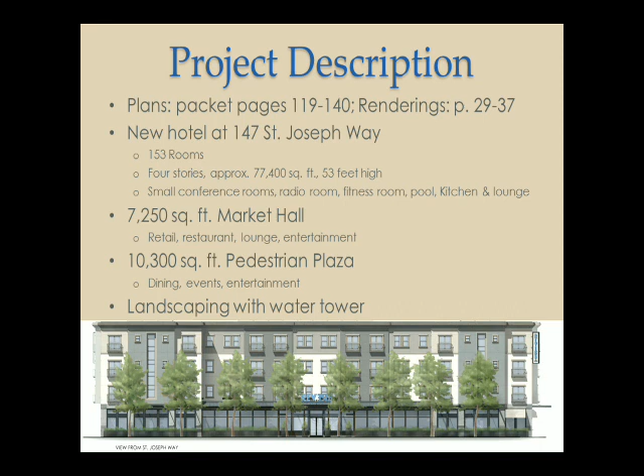The project provides parking for 167 vehicles. There are currently 166 parking spaces associated with the Park and Ride, and the project will replace 30 of those spaces. The parking is landscaped with shade trees and screening shrubs to prevent visibility from the roadways and public ways, and is implemented with water quality BMPs throughout.

The project also involves reconstruction of St. Joseph Way to conform to city design standards, including sidewalks and streetscaping on the hotel side of the street, and parking for 16 vehicles. Though not technically part of St. Joseph Way, at its western terminus there's a proposed wetland water quality interpretive area.

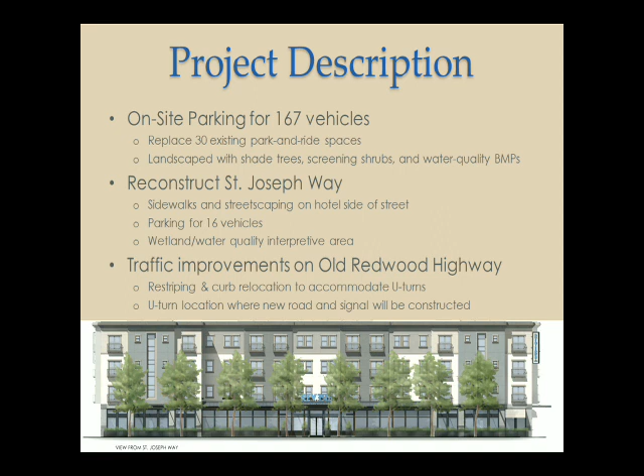There are also traffic improvements proposed on Old Redwood Highway. As part of reconstructing St. Joseph Way, there will be a turn median where it meets Old Redwood Highway, allowing left and right turns in, but right turns out only, so only southbound travel onto Old Redwood Highway. To allow for some northbound traffic, we've asked them to include a U-turn at the location of a proposed traffic signal, which I'll show more of as we move on.

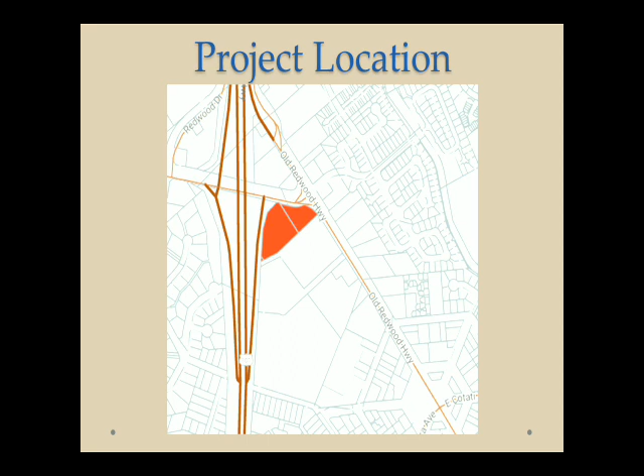So that's where the project is located, pretty much the southwestern corner of Gravenstein Highway and Old Redwood Highway. This is a view looking south, which also shows the existing parking lot and the heavily compacted area off to the left in this aerial.

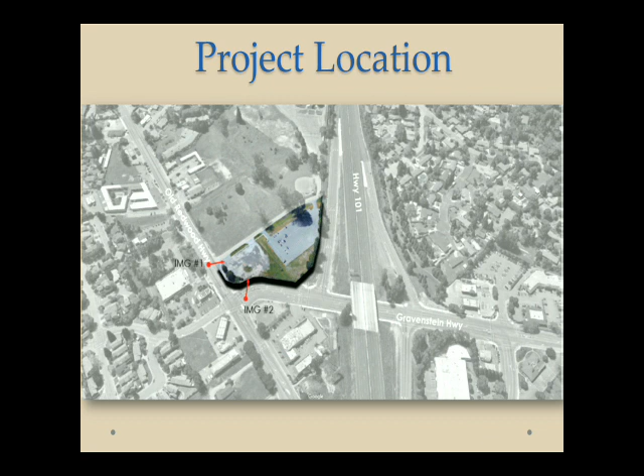Today, in this image, you can see there are two major lots and a tiny third lot, a small triangle about 450 to 500 square feet in size. The majority is covered in asphalt with the park and ride lot, and the far right side is denuded gravel. That's an old site, used to be a gas station, and Tubby's Restaurant was there. Since then, all the tanks have been removed, remediation has occurred, and the site's been cleared, but currently it's vacant and has been used for a Christmas tree lot for the last few years.

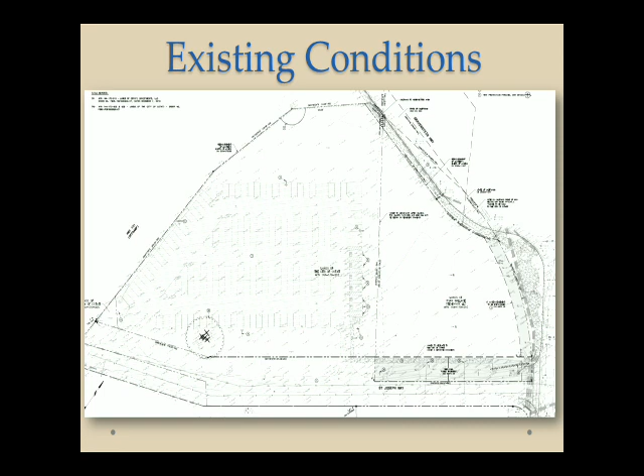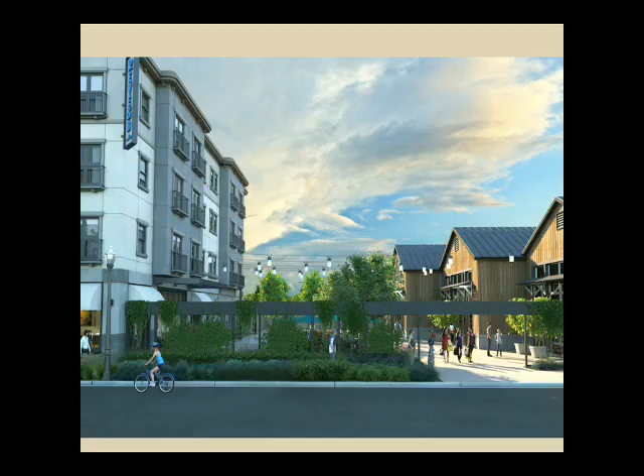This is a rendering submitted by the applicant, showing how it would appear as if you're on St. Joseph Way. It has active ground floor uses in the hotel, and the market hall also has active uses such as restaurants and retail. This is precisely what's called for in the DSP, and the pedestrian plaza is also an important component of what the DSP is looking for, pedestrian-oriented hotel development.

Looking at the hotel, you can see some of the architecture. It uses a flat roof, offset planes, a series of colors, and decorative windows, all of which help break up the massing of the building. The barn-like structures are distinctly different but complement the building because of the historical features utilized in the hotel itself. Also, the cornice of the hotel is done in a way reminiscent of turn-of-the-century commercial buildings and provides an attractive top to it.

Access to all of the market hall is from within the plaza; that's the way you will access those buildings. As well, from the plaza, you can access the hotel.

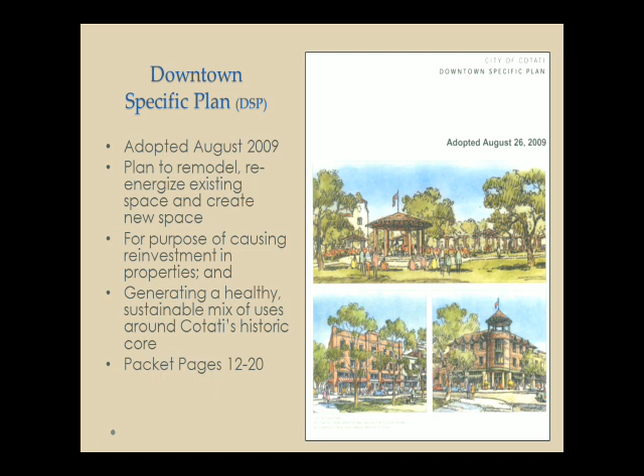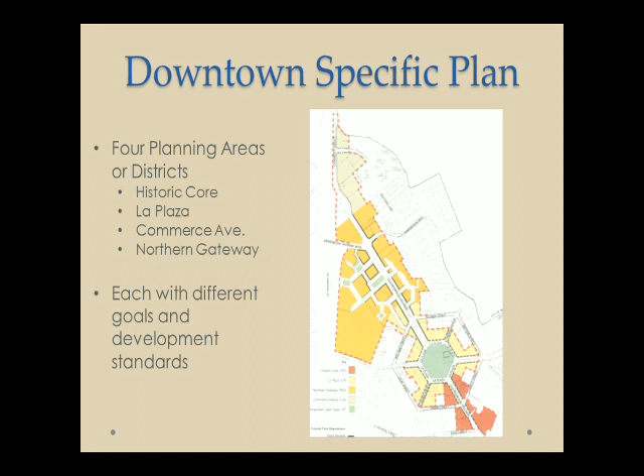Within the downtown specific plan, there are 4 planning areas. There's a historic core to the south. There's La Plaza, around La Plaza Park. The Commerce Avenue, which is all the way to the north of this site, and then the Northern Gateway, which is this particular site, which this site is within. Each of the different areas or districts have different goals and development standards. This one is located in the Northern Gateway.

The focus, according to the DSP, is for regeneration. As I said, this was once a used site, so it's about reutilizing the sites, and for revenue generation. It quotes this: the DSP says this area of the plan presents the largest continuous opportunity for a substantial revenue stream. It transforms underutilized land into a mixed-use district. Two primary goals are to reconfigure Old Redwood Highway into a vibrant mixed-use, multimodal, and beautiful urban street.

And lodging, again, is specifically called for in this district: develop a pedestrian-oriented hotel with active ground floor uses, capture sales and hotel taxes. Some of the key development standards include the maximum height, which allows for 4 stories and has a 50-foot limit.

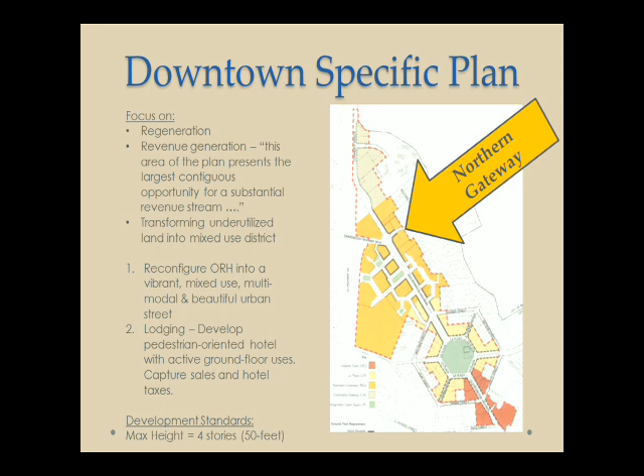Part of this proposal tonight, we're going to be talking about variances, or considering variances. There are 2 variances that this project would require. One is to the block length, and we'll look at that in a moment. The DSP establishes a maximum block length of 500 feet. As proposed, the block length, the way it's calculated, is 570 feet.

In this case, a mid-block road connection—let me just go to this next slide—this mid-block road connection is not something we want. If you look at this site plan, there's no way to run a road to connect to the 101 off-ramp or the Gravenstein Highway. Neither of those connections would conform to Caltrans roadway standards, nor would we want to run a road through this development.

To do so would significantly diminish the good assets of this project, including the plaza and the market hall and the pedestrian flow that it creates. That said, the pedestrian plaza does actually create a connection between Gravenstein Highway and St. Joseph Way. So the block is interrupted by a pedestrian way, which I think is just as valuable as interrupting the block with a road.

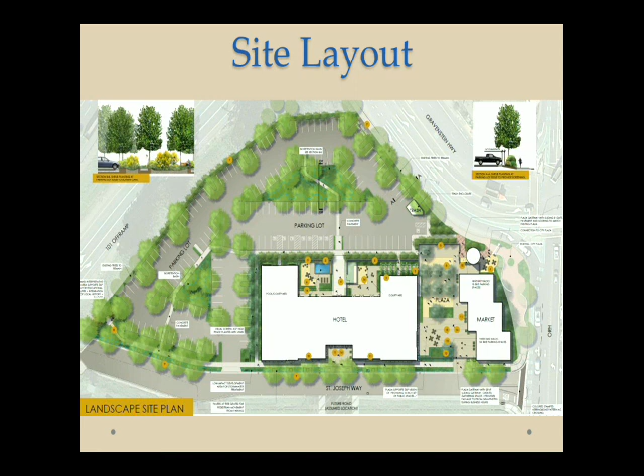The variance that we're going to discuss next is the building height. The downtown specific plan allows for 50 feet in this district. It is the tallest district within the specific plan. Other areas of the plan limit height to 35 feet. This allows up to 4 stories.

As proposed, the roof of the hotel is at 50.5 feet, and the parapet extending above the roof goes to 53 feet. On the roof of the structure are elevator and stairwell access, which extends up to 58 feet. The code allows for a 3-foot addition for features on top of the building, so we're really looking at about a 5-foot variance to the height, to allow for the parapet, but also the elevator and stairwell access, which are important safety features.

With respect to the height, in terms of whether it could be reduced: the first floor height is 16 feet, basically from the ground to where the second story meets it. So the ceiling height inside is comparable to what you're seeing in here, or less. To reduce the first floor height would diminish part of what's called for in the specific plan, which is active ground floor uses.

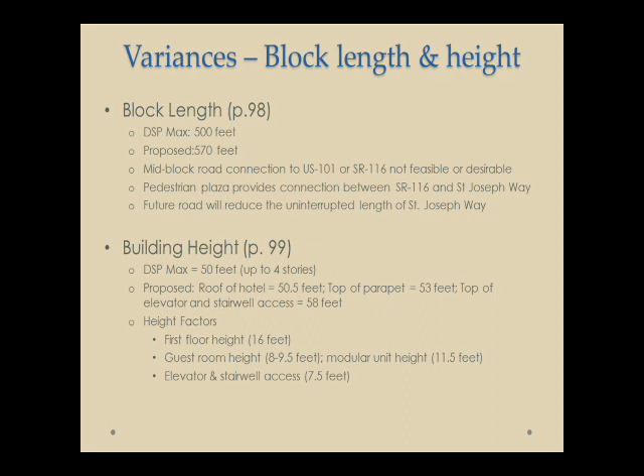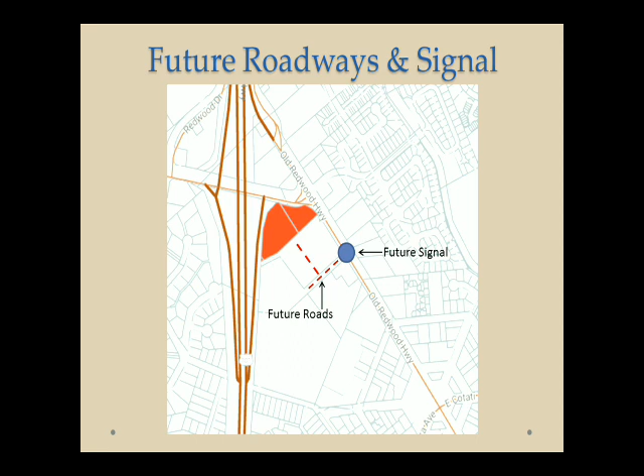The property currently has 166 parking spaces and a 1-acre vacant commercial lot. It's already been entitled to build much more than what's being proposed. If we were to replace it with a gas station, like was there previously, it would generate a lot more traffic than what we're considering here.

In terms of uses appropriate for this area, a hotel is really the most desirable use we can think of. It generates far less traffic than all the other commercial uses we could consider, and less traffic than, say, a mixed-use development with homes. This is also a poor location for mixed-use development because of its proximity to heavy roadways.

When the properties to the south are developed, traffic from the hotel will also be diverted through roadways down to where this future signal will be, along with the U-turn pocket that is proposed there. The developer will be installing a component of the future intersection by widening the road and adding some street markings.

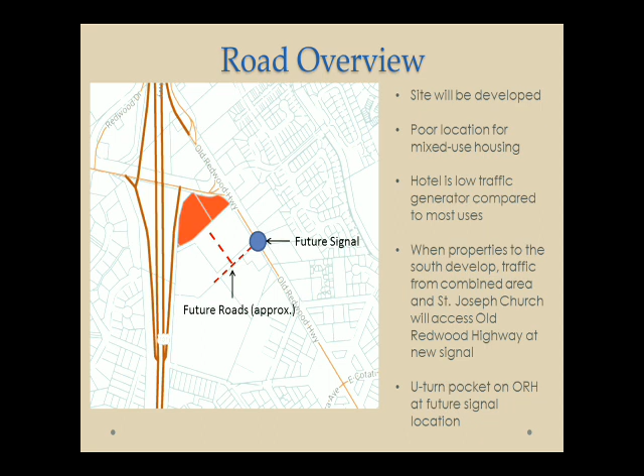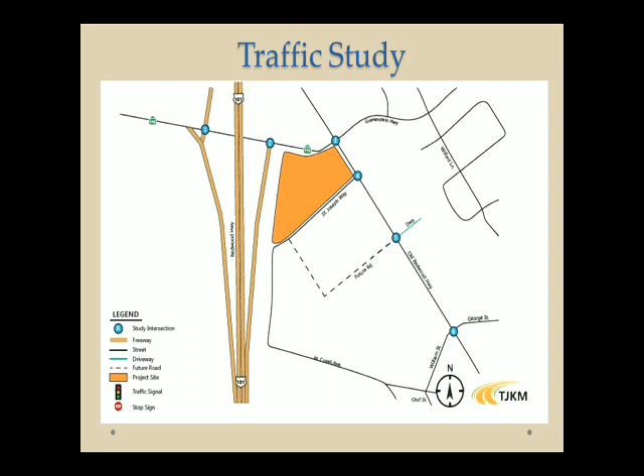The traffic study looked at six major intersections: the on and off ramps at 101, the St. Joseph Way intersection with Old Redwood Highway, the intersection of Gravenstein Highway and Old Redwood Highway, the location of the future road, as well as the four-way stop intersection at William and George Street.

The traffic study used a conservative approach—they actually considered the market hall as a supermarket, and studied peak hour AM and PM delays at all the study intersections. All intersections operate at acceptable levels of service with the project. William and George currently fails, but the existing peak hour delay will not exceed the significance threshold with the project. That intersection is also ultimately proposed for a signal, which will help.

There's a right-in, right-out configuration that prohibits left turns from St. Joseph Way, and a U-turn pocket at Old Redwood Highway. This allows southbound traffic to make a northbound turn, hopefully preventing cars heading north from coming into town or turning around in someone else's driveway.

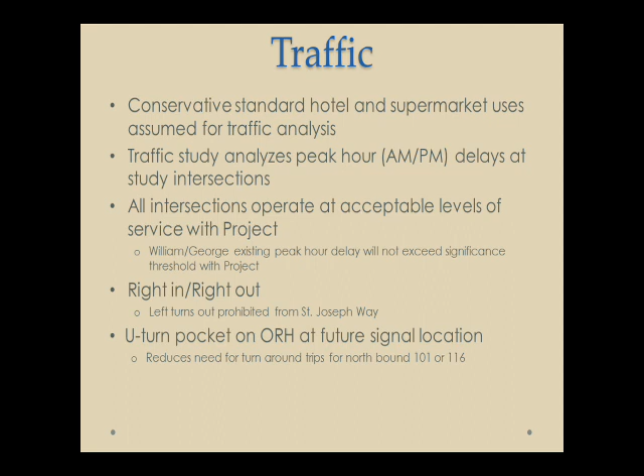As stated before, there will be use permits required for this project: a permit for lodging/hotel, a use permit for outdoor dining on private property, and a use permit for alcohol sales with entertainment. All these uses are permissible with a use permit, and have been addressed through the conditions of approval, which begin on page 105 of your packet, including the mitigation and monitoring reporting program that's part of the CEQA document.

The conditions also include noise monitoring during events, nuisance provisions, and safety and security conditions. There are conditions requiring recycling and composting, as well as ensuring facilities are sized appropriately. It will include a parking management plan, and there are conditions requiring permits for any events that exceed the conditioned hours or the parking capacity of the project.

As I said before, there's a CEQA document. This was a mitigated negative declaration, prepared in accordance with the California Environmental Quality Act, which is what CEQA is short for. The document was circulated for 30 days. It did identify potential impacts to the following: air quality, biological resources, cultural resources, geology and soils, which was fossils, greenhouse gas emissions, and noise.

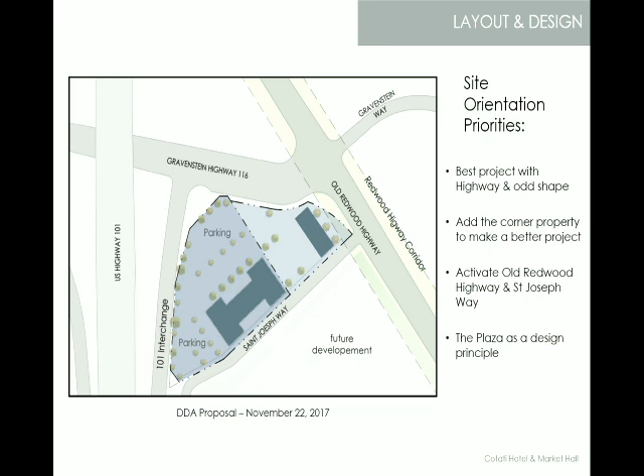So as you can see in looking at this diagram, if we hadn't done that, then I think what you start to see is a more suburban response, which seemed out of character and out of alignment with the overriding Downtown Specific Plan goals of creating a more urban or intense downtown by joining properties, joining buildings, using common area - the next one.

So this, you've seen this image, and we'll talk quite a bit about it when I bring Christine up to talk about some of the details of the site planning and landscape improvements. But this created a whole different project. We think it's a nice combination of what the hotel does with its architecture, what the Market Hall did with this more agrarian look, which our firm has a lot of history with, working on projects like the Barlow. But what the plan really was telling us, through the help of town staff, Damien and Vicki when she was here, is that downtown is a nice mix of buildings in general. They don't all have to look alike—in fact it's probably preferred that they don't. But you start looking for connecting ideas that give them meaning to one another, creating a bigger mosaic for the downtown moving forward.

I think the challenge for us as a team, and possibly for the town, is that this is the first significant project out of the gate. So we had our training wheels on to some degree, trying to figure out how all of this was going to work, but that's not necessarily a bad thing. Sometimes we had to take a deep breath and say, alright, we're marching this way, and we don't want to be pulled that way. Anyway, I'll come back up later to talk about the architecture and how it works, building off some of the things in the staff report.

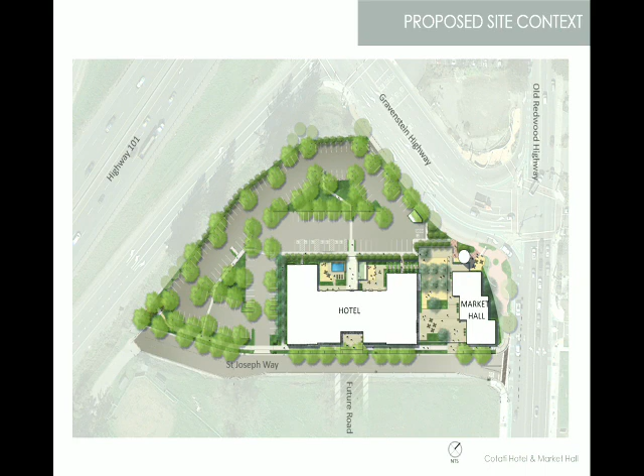Some of the other important components of the site planning I'm going to get into in a little more analysis, so I'm going to back off to a diagram. Circulation is always really critical to site planning, and on this particular site pedestrian circulation was really important. Creating this walkable commercial mixed-use area was important to meet the goals of the downtown specific plan. Some of the circulation components we've created—JP mentioned we're doing a wetland interpretive area at this corner, and we're calling this line the urban trail. That's the pedestrian circulation that's open to the public all the time and connects public amenities like the city plaza here and the wetland interpretive area.

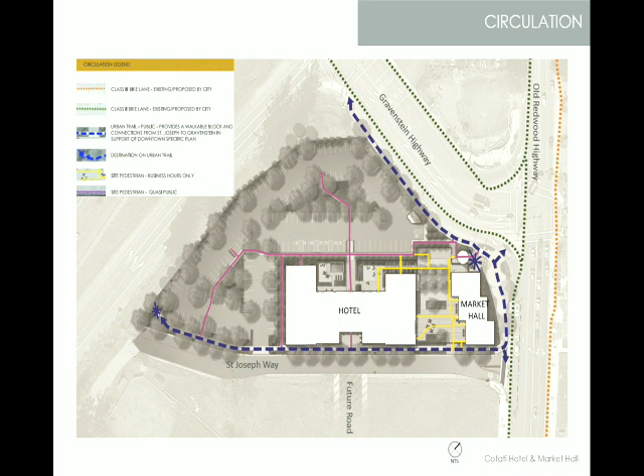There's also parking along the street. We'll have more of an urban edge with raised planters at the building to create more of that pedestrian zone for people. That's very pleasant.

Along this 101 edge, we really wanted to pull some of that agrarian feel into the site and include a hedgerow. We'll have very columnar trees amongst the oaks and redwoods already there, creating more of a hedgerow space for birds and beneficial insects and seasonal interest, and also to help mitigate some of the noise and pollution from the road.

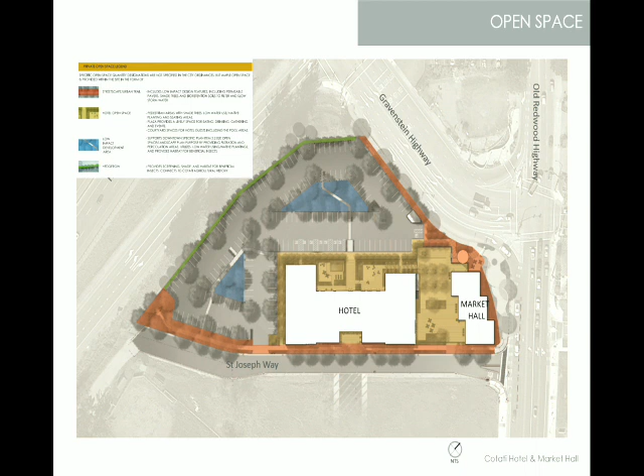Sustainability was really important, an important component of the specific plan and also your goals as the town, as a city. So we've met them in several different ways.

Through the building energy, we're proposing some solar on the building itself. The exterior and interior lighting will all meet California codes for energy efficiency and dark sky. We provide opportunities for alternative transportation, so there'll be energy efficient vehicle parking spaces closer to the building, and we'll also be plumbing for future electric vehicles.

And then, of course, all the low impact development, which is helping with the stormwater and the water quality on site.

I have to look at a bigger vision because there are a few other things we've included that I want to mention. One is bicycle parking. We'll be providing temporary bicycle parking within the courtyards for people coming to use the space, in the form of bike racks. The building itself will have some covered bike parking that's more secured for employees. We'll be planting trees, obviously, the solar I mentioned, and supporting the parking policy measures for prioritized parking and the electric vehicle charging station plumbing.

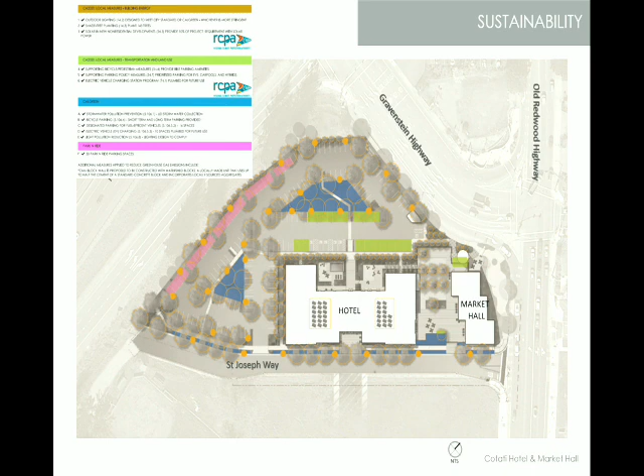We'd also be proposing a wall along this edge, really to provide some sound baffling for the users. We're proposing to use an earthen block that has less concrete, so it's a sustainable material, and it's really beautiful - they used it at the Sonoma Academy. We'd have vines on it, so it would be an amenity to the project, not just a sound wall. We'd also propose some columnar trees along this edge to provide the sound of the leaves, and really help provide a little separation from the road noise.

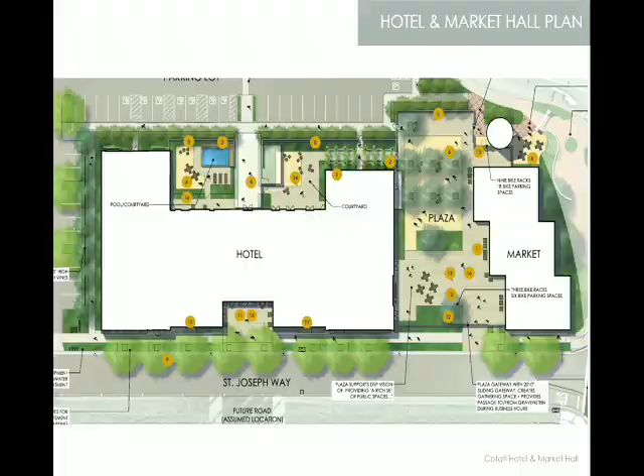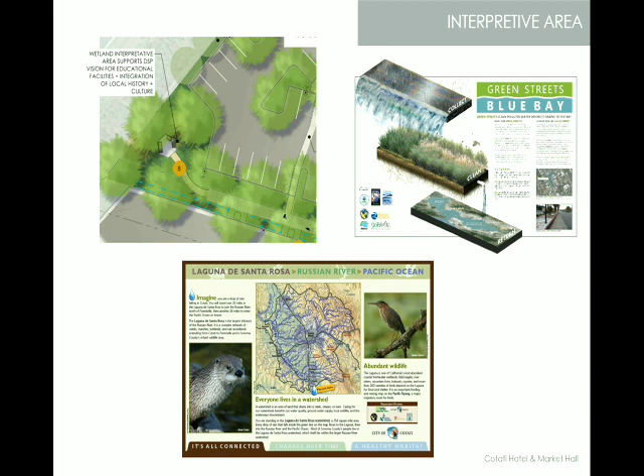This is a little close-up of the interpretive area. We're anticipating a decomposed granite area with some seating and interpretive signage. This is a photo of something you already have in town, and this is something we've prepared for a project in San Pablo. There are opportunities to incorporate not just information about the current watershed, but also some of the sustainable practices being shown on site. So we'd like to display that a little bit.

The parking character is a bit different—I think you have something similar with the Lowe's. There'll be bioretention in the parking lot, and we've proposed a path through it. You'll have areas of taller shrubs and then lower grasses. We've proposed some seating, and of course shade trees, so it's not just a paved parking lot.

At the Gravenstein Highway edge, we've been working with city staff to create a more permeable edge here. Originally we had more columnar trees lining that whole street, but they asked us to open it up, put in taller shade trees, and have lower plantings at this edge to block some of the car headlights.

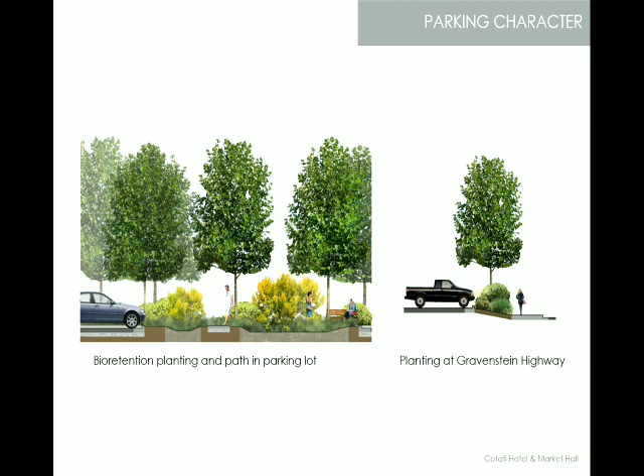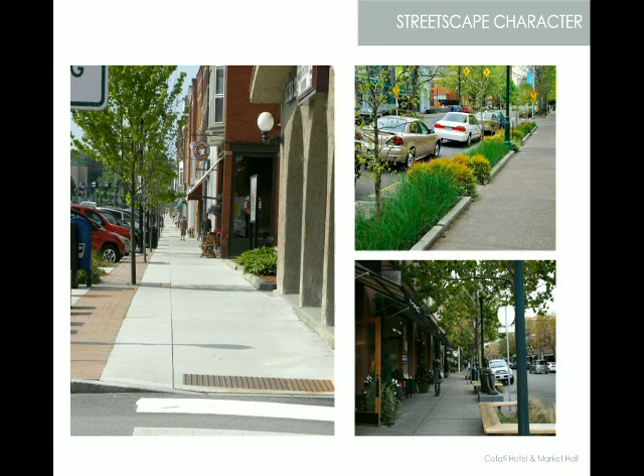Streetscape character will be more urban. Pavement will be permeable pavers, and we'll have street trees with pavers from the parking area to the sidewalk. In our project, we'll have low-impact development in this area of the sidewalk.

And here I'm going to pass it over to Mitch again to go through the architecture and the feel of the plazas.

So what I'd like to do is build off some of the comments that were in the staff report. It was fairly detailed, and I appreciate what JB did in explaining this.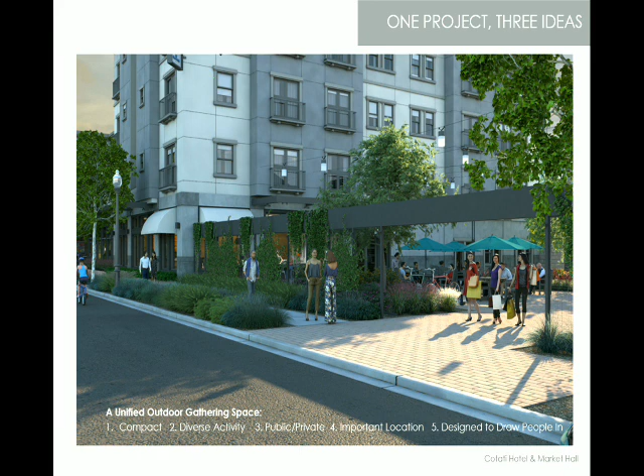Actually, to go back to the previous one, I take it back. Let me go ahead here. Well, I'll come back to the St. Joe's image in a second.

I think what's interesting about this site, the way we started to categorize it after a while, is it's nowhere to run, nowhere to hide. There's no back aspect to the site, you see it everywhere. You see it from the freeway, the off-ramp, 116, Old Red, St. Joe's, you see it coming from the town center. I think it became important that while the pedestrian experience is really important, and it's a strong theme, as it should be in your downtown as you're rethinking the way you use space in the city center.

But let's face it, you are going to experience these buildings in a car. It's important that as you're sitting at these intersections, the architecture is interesting and has different forms. There's a layering idea at the corner using the 1.5 to 2-story Market Hall building, then having it tier up to the 4-story building, which in plan is almost dead center in the total site, which we felt was an important place to put that building.

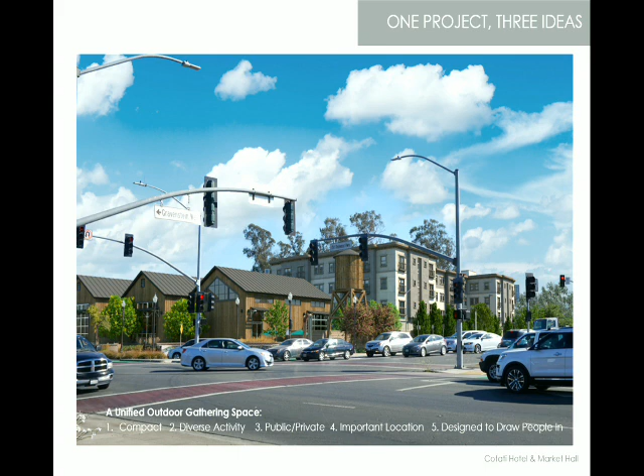But I think you see this in this image, and then again here. This is 116 as you come under Highway 101, and see the long version of what the development's doing.

And let's face it, if you have to look across the parking field, I think we've spent a considerable amount of time and energy making that as memorable as possible, both from an educational point of view with the interpretive wayfinding, but also just the way the landscaping works.

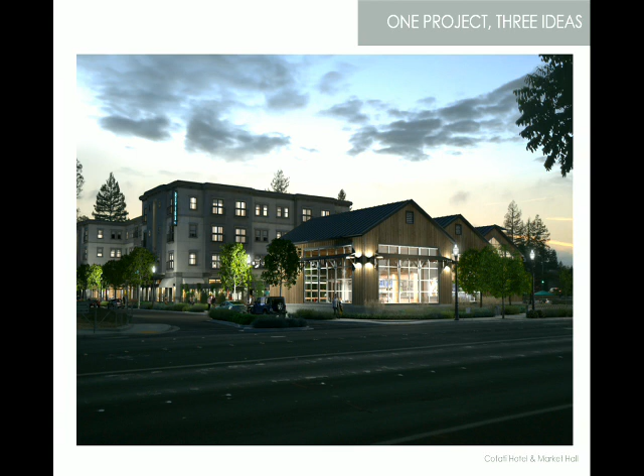So what we really like about town centers and city centers is that the architecture has the opportunity to go out of character and transform itself in the evenings, and I like that a lot. I'm a big believer in what I call urban lighting. When I was a planning commissioner in the town of Windsor, it was one of my pet projects to figure out how that works, and we're still working on it. I think it's a huge opportunity to express a different kind of personality to development in general, and this project really offered a significant opportunity to do that.

So the buildings open up, you see what's going on. I think it's important that the community sees activity, not just in the public realm, but in the buildings themselves. In fact, our lighting designer, who couldn't be here tonight from Summit Engineers, really did a nice job embellishing the architecture using these lighting ideas.

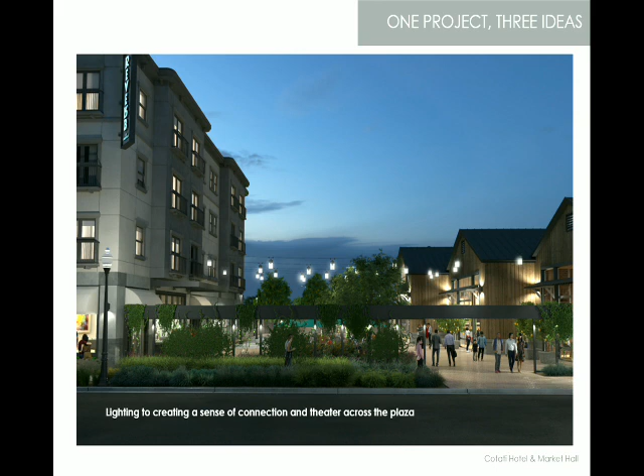Same thing with the public space, the plaza. These catenary lights, the way you transition through this structure, makes it very magical, kind of our little tagline here. It's very theatric, which we like. And again, it creates a different look and feel for St. Joseph's.

And also from the corner.

I'm going to open this up for questions unless Ken has any other comments. I can't express strongly enough the opportunity the city has to put a project together, using a document that's 10 years old, but doing something at this scale is unique. We've had tremendous support from Damien and his staff in making that work. We're anxious to hear your comments, and we're here for questions. Thank you very much.

At this point, the Planning Commission will ask questions of staff, and then we'll open it up to the public to ask questions and give their input. So do I have anybody who wants to ask questions? Go ahead, Ben.

Okay sure, I've got a few. JP referred to the market hall as two-story. I'm curious, is there really a second floor, or are we just referring to the height? There is a mezzanine inside the building. What's the difference between a mezzanine and a second floor? I would say a mezzanine doesn't cover the entire first floor. Okay, that would be how I would describe it.

Okay, thanks. The 16 parking spaces on St. Joseph's Way, is that both sides or just the north side? North side. So whatever development goes in on the south side would have the opportunity to create street parking there and count it against their parking needs? Absolutely correct. Okay, thanks.

On the Gravenstein Highway side, I think there is a fire access, isn't there? Will that also be pedestrian porous so pedestrians can move through it and across the parking lot? Yes, the emergency vehicle access only onto Gravenstein Way is protected with removable bollards, so no vehicle access, but pedestrian access can fully go through there.

Unlike today, which is completely fenced all the way down towards the plaza. So, any more questions? At this point, I'd like to open it up to public comment.